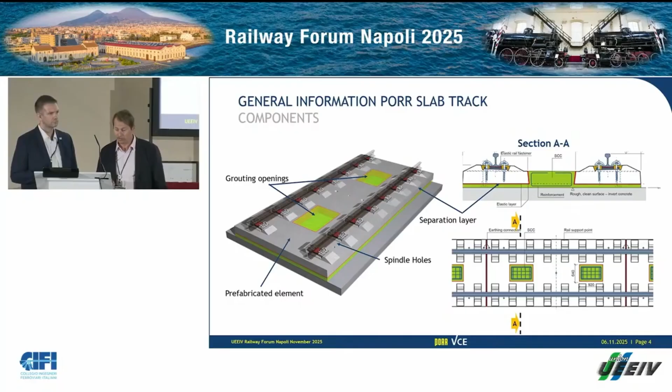I think ÖBB required this when the system was created, to maintain the debonding between the self-compacting concrete cast in situ, the monolithic component, and the prefabricated element, in order to be able to replace this slab.

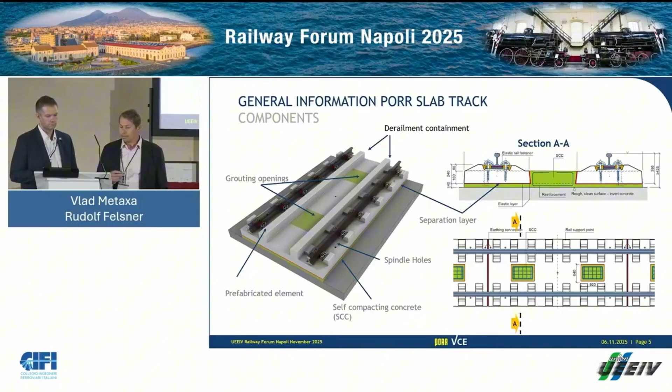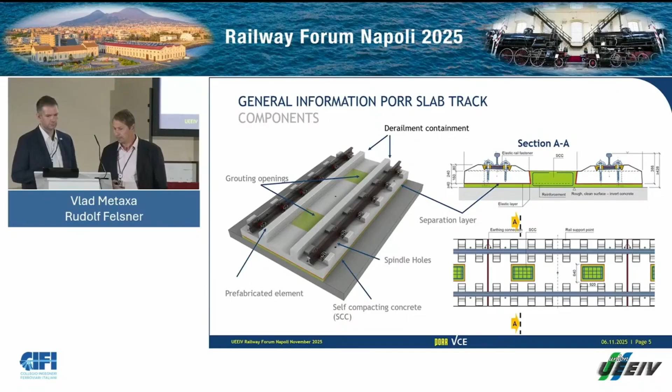And then we have the self-compacting concrete, which is a standard normal concrete, of course with a different flow slump. In terms of adaptability, and we'll go through all the projects in detail, we'll show that the derailment containment can be embedded in the system, which reduces the cost overall during production.

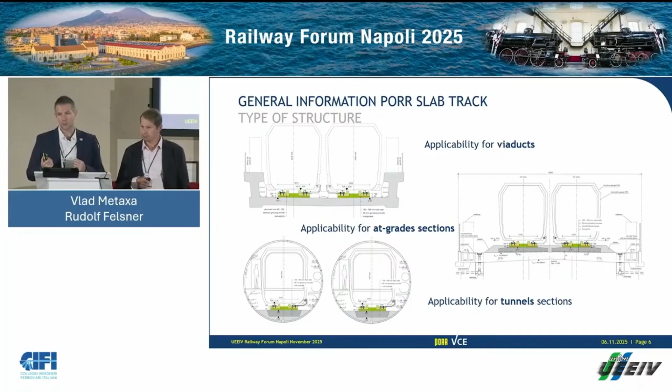From the applicability point of view, as a designer, I brought some plans with me. To sum up, slab track Austria fits any structure - tunnel, bridge, or grade section. We just need small adjustments to detailing, and the same fundamental layout simplifies design coordination across contracts and also reduces interface risks.

No project is like another, so there is also modular equipment that can be placed on slab track Austria, such as integrated manholes, noise protection, or a third-rail guardrail, and many more. And of course, the system is also available for turnouts to realize switches and crossings.

Beside the turnouts, we also had the installation of the rail expansion device, which is a very critical component on long bridges that require such complex systems. This was already implemented and has been under operation for 1.5 years now, and we have successful results from it.

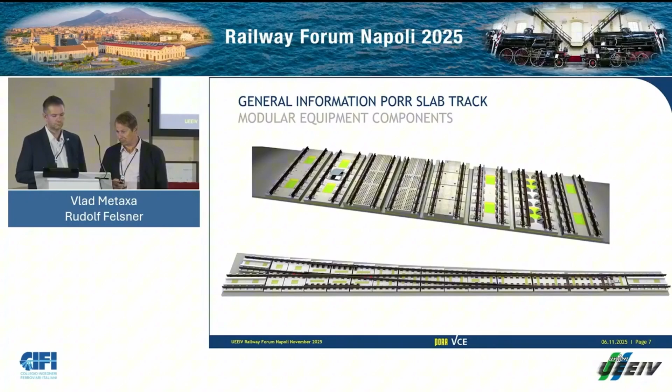Now we will go a little bit more practical, finishing with what was just an introduction to let you know what we are talking about. But we will go into the project - I think this is more or less what everybody's here for.

What were the challenges? For example, we start with the HS2 project. The main challenge was the high operational speed and design speed, which was premier in Europe - the first time an authority directly requested the track be designed for 400 kilometers per hour and have an operational speed of 360 kilometers per hour.

Of course, that was the challenge, but the good thing on this project was that the track component was awarded early. Instead of waiting years after the civil contractors completed, the track package was awarded at the beginning. That helped with interface integration with the track, and to design and optimize the structures for this type of track, knowing directly what type of track would be provided.

This contract for us is a design and supply contract. We will not do the installation - we'll just provide supervision for installation and training. However, we will supply and maintain, and ensure the quality of the produced element is in accordance with our specifications and the client's specifications, and of course the installation will also be in accordance with that.

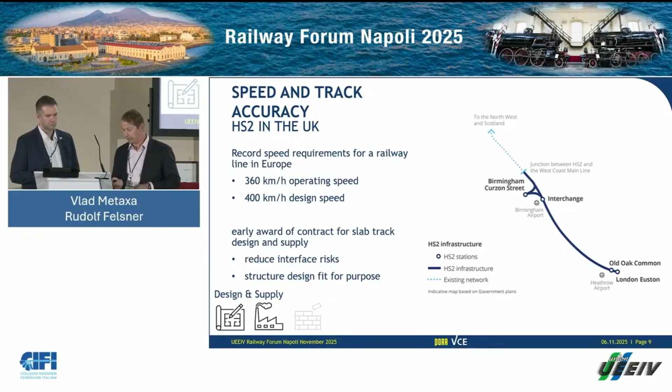From the design point of view, the main part was design optimization, or let's say the clearance, because every millimeter counts at 360. Also the interface management to get fit for purpose - the civil works leads to a slim geometry, which also counts in weight and material reduction. Because of the lower self-weight, this helps structures slim down and have much less self-weight on them.

So it's easier for the structures and for the logistics. Also for us, the information modeling here was focused on asset information modeling and not BIM modeling. It's very important to get the right information at the right time, to the right phase of the project, and not put too much into the models.

Now, going forward, the project commencement of production is on the way. We did not start production yet, but we still have a lot of coordination with the awarded track installer, and already a lot of dialogue in terms of implementation of the system.

So the key point for this project for us is the high precision accuracy of the prefabricated elements, and the coordination and interfacing, early interfacing with the party that will deliver the project.

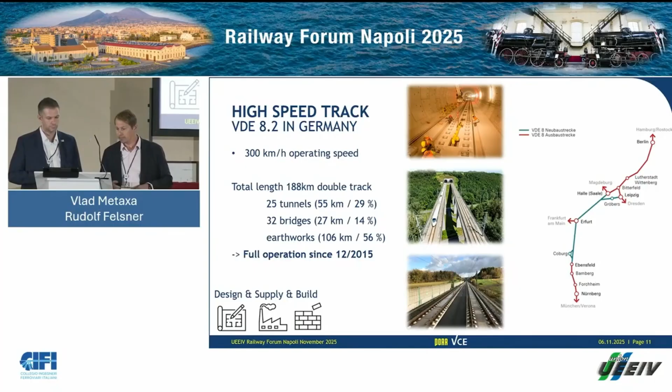From our perspective, it was design, supply, and build, so we had the full package of the project. What's important to mention, and we are proud of, is that Deutsche Bahn tested the new generation of Siemens trains on the area that was designed for 300 kilometers per hour, and they reached the speed record of 405 kilometers per hour.

Of course for Europe it's a premiere, and what we want to highlight is the accuracy of the track. They didn't have to do anything on the track for this special test. The accuracy and quality of the track was the same as when we left it, even 10 years after operation.

So this shows properly that a quality, well-installed track in the beginning will last and will decrease the maintenance cost, what our colleagues from the authority were mentioning a little bit earlier.

So let's switch to Austria, another country, my home base. Here the space constraints at the Koralm tunnel were the biggest challenges we had to deal with, because of the small tunnel diameter and its length of 33 kilometers in twin bores, and also the strict limitations on noise and vibration. Also special for the design was the manholes for the drainage in the middle of the track.

The solution that we came up with for this project was to reduce the width. Normally our slab is 2.4 meters, but for this project we reduced the width to 2.12 meters.

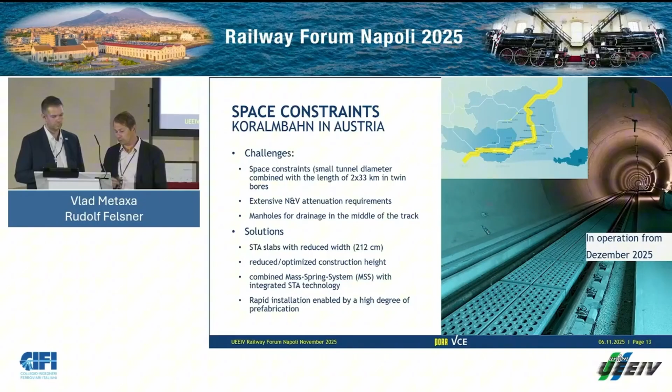So our colleagues from Deutsche Bahn, from Bahnbau, came with a clever idea, together with ÖBB, to install the sections of the tunnel even without having full access from both ends. This was a premiere for us, and it was very successfully implemented.

Going forward, some details from the design side: we dealt with the width of the system, because we had some higher tolerances to compare, and there we had to reduce the clearance. We achieved this with integration from the mass spring trough to a mass spring slab system.

The same is true for the system height. We also tried to make some improvements, reducing the system height by nearly 40 centimeters. This has advantages: less alignment changes are needed in the vertical direction, and no special tunnel shapes are needed anymore. Tunnel shapes, especially for a long project like the Koralm tunnel, require bigger diameters and more construction time, so we don't need these special tunnel shapes because of the reduced height.

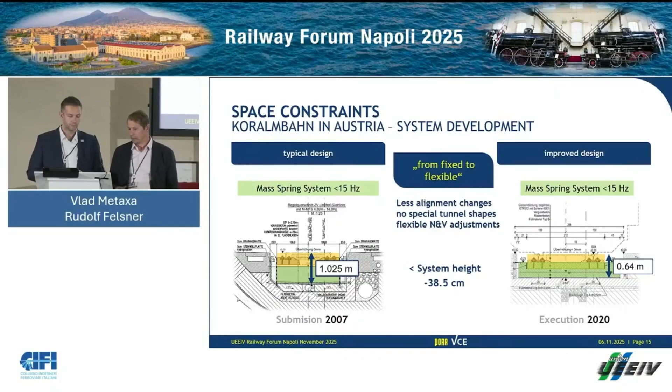So we just move from fixed to flexible. Moving on a bit, being aware of timing, we will go now to other continents. As you go further away from Europe, you find and face different challenges.

One example was in Melbourne, Australia, where we delivered the track for CYP, the Cross Yarra Partnership. There we had to adapt the slab to 1.6 meter rail gauge, broad gauge. We designed the slabs to still be transportable in a container, so they were thinner, not 2.4 meters, with a reduced width. They were produced with integrated derailment containment, and we addressed complex noise and vibration requirements as a floating slab track, high attenuation track, using a different fastening system within the slabs.

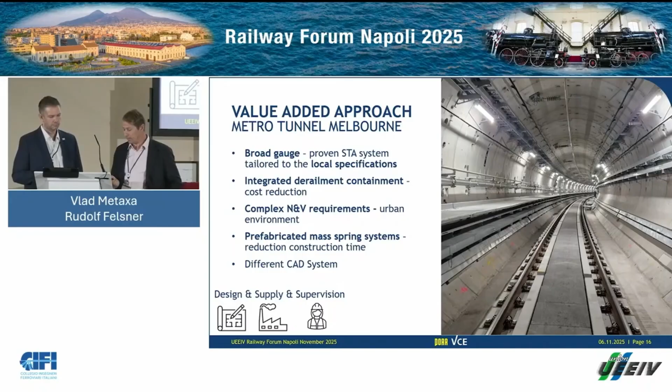We then moved to the next project, the NCRTC in India. There are people here who know about this project. It's a landmark for us because here we did only the system design and supervision for installation, under a contract with the authority, which was then implemented by local contractors, so the in-country value was kept in India.

One of the most complex and challenging projects we delivered was the Doha Metro in Qatar, which was complex from multiple perspectives. One of the most challenging points was that we had to coordinate with seven different civil contractors who were constructing tunnels, stations, and elevated sections at the same time, integrating the whole track together and delivering on time. That was the challenge of the project and the tasks we had to cope with.

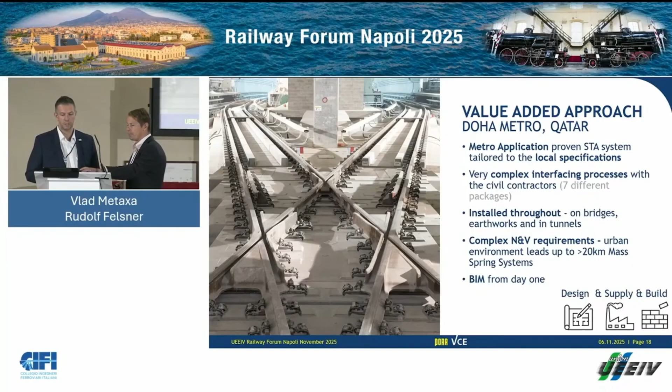The next project is Stuttgart 21, which was just completed by our colleagues from Bahnbau. We're talking about 33 kilometers of slab track installed in tunnel.

The key point we want to highlight in this project is that the slab track was installed without the rail. Usually PORR slab track is installed using a top-down methodology, starting from the top of rail and going down, compensating for whatever is underneath. However, in this part of the contract, we did not have the rail to do the installation, but we found solutions to do the survey and maintain the accuracy of the track and deliver on time.

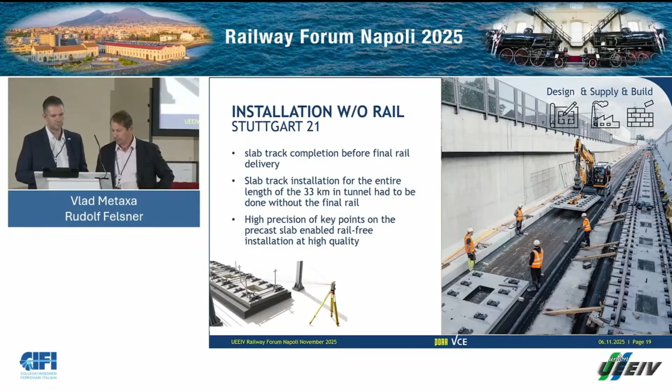From the design point of view, we had some design approaches and learned lessons from known asphalt layer-based systems. We modified the asphalt mix for longer durability and lower environmental impact. Also, the asphalt layer was fully covered - it's not as important in the tunnel, but as you saw in the earlier picture, it was also protected from the sun outside.

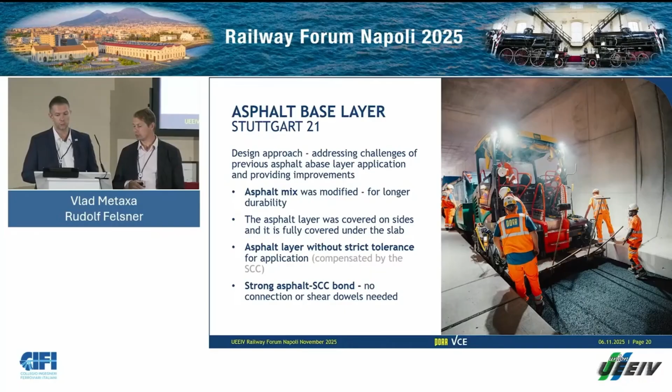The main interesting thing is that the asphalt layer can be made without strict tolerances, so it's not necessary to do extra work steps to get a smooth surface, because our self-compacting concrete will compensate for this difference in tolerances. Therefore we don't need any connections between them - no shear dowels or anything else to connect them. There's just good bonding between the asphalt and the self-compacting concrete in the system.

Now going to the overall summary - it's very important to say that this system has been used for four decades and has proven technology, so we can stand for the future, for the new challenges and new requirements we will face, all due to the fact that we're talking about a prefabricated modular panel.

From my side, looking at the clock, the most beneficial aspect of this system is that it's modular. It's made with high precision, and it's really proven over decades. I would say we are ready to face new challenges.

As a closure, and with that we'll finish - the main keywords are precision, performance, and partnerships. We will find ways to work with clients, find ways to work with authorities, and deliver what is needed. I'm proud to make the closing.

For me, looking back over my personal decades of designing slab track Austria, precision and partnership stand out as the key ingredients for a successful slab track project - and that's exactly what slab track Austria delivers. Thank you very much.

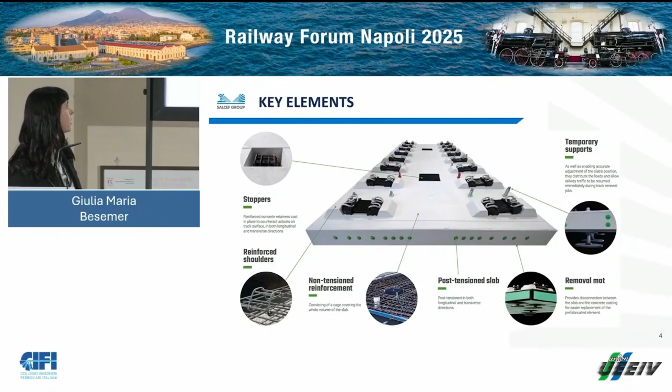Our slab indeed is particular in some ways. We have a reinforcement that is normal reinforcement, but also post-tension reinforcement. So our slab is post-tensioned in 2 directions, in the longitudinal direction and in the transversal direction.

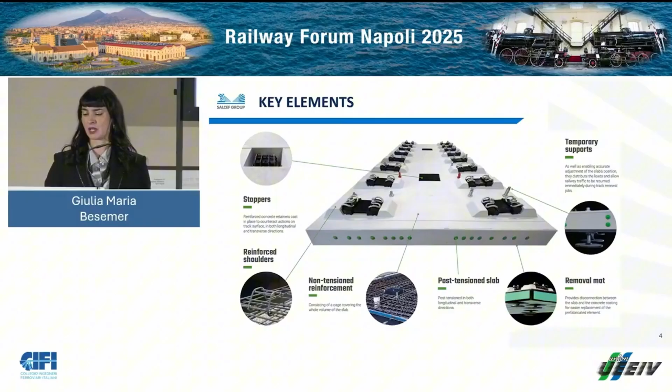Also, we have 2 key elements: the mechanical support system with which our slabs are equipped, and the possibility to produce the slabs with a variable geometry system. But let's go a bit deeper into these 2 topics.

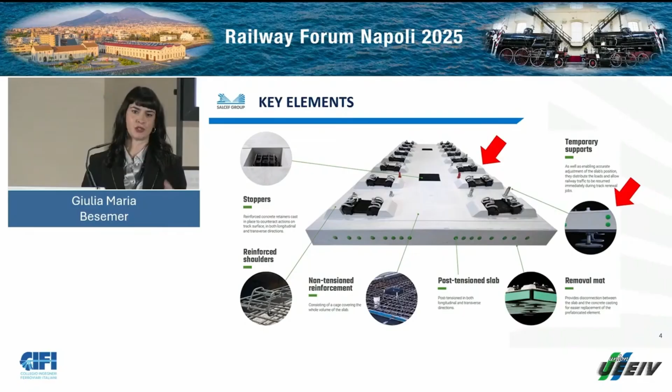The mechanical support system is actually the heart of our system. It is composed of the spindles that you can see in the picture on the right. The spindles are applied on the underpart of our slab and are composed of 2 elements, a screw and a base plate. Our support system fulfills mainly 3 functions.

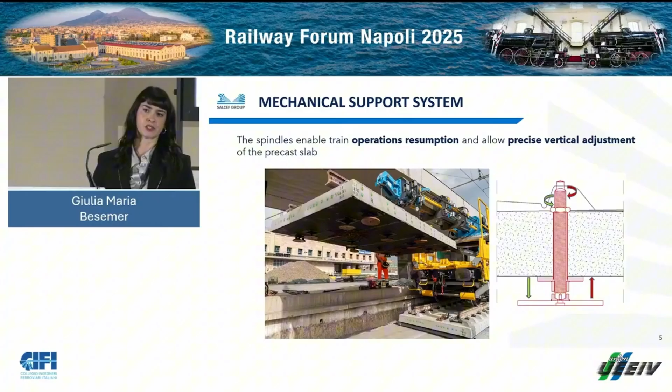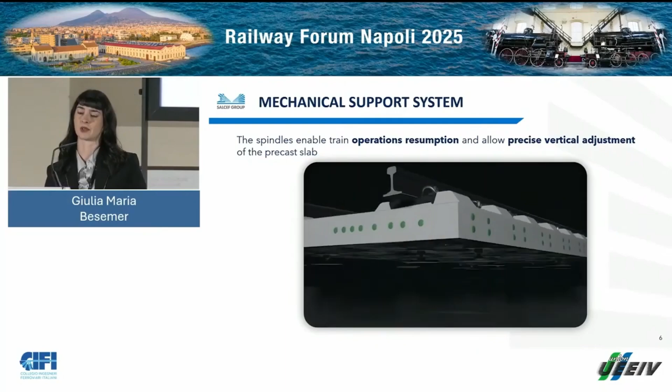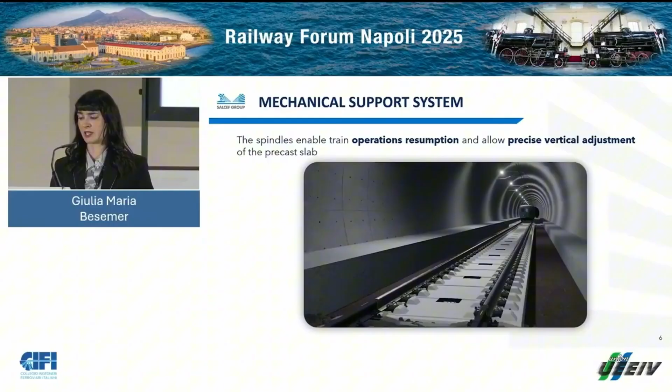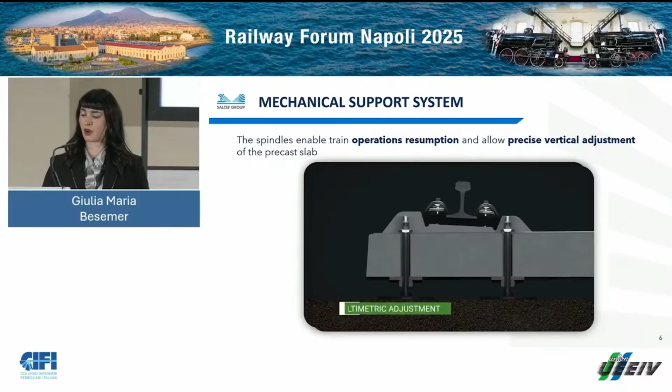So the first function is for sure the most important, because it guarantees temporary support during the installation phase. Every slab rests on 14 spindles, and so in this temporary configuration, it is possible to resume train traffic just standing on these mechanical supports. Second, acting on these spindles and on the screws, it is possible to adjust the vertical alignment of the slab, and so to reach the design alignment.

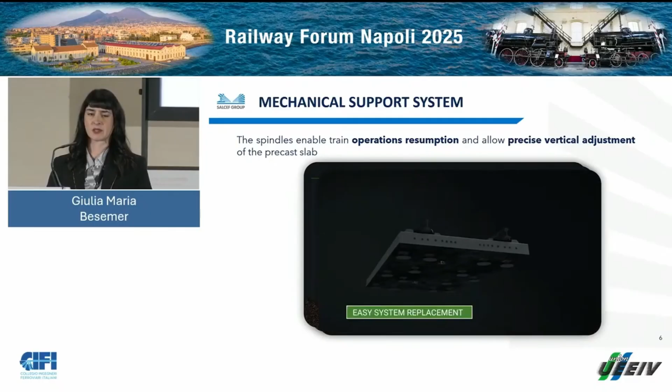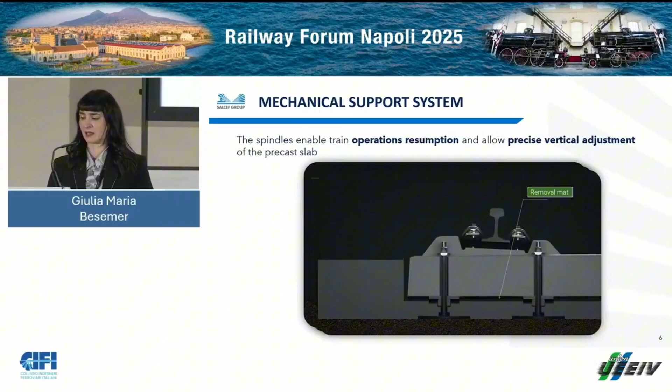Third, it enables maintainability of our slab track system. Reinserting the screws in the slabs in a future time, it enables us to lift the slab and to replace it with a new slab. This is, for instance, necessary when a slab gets damaged. But this is not everything.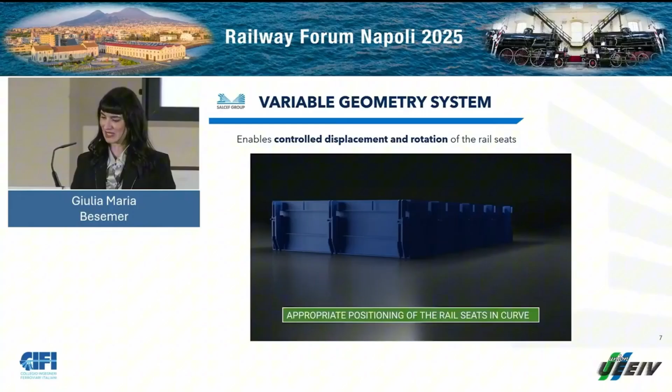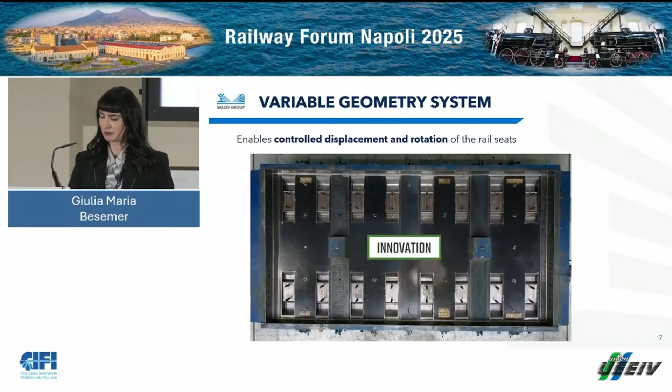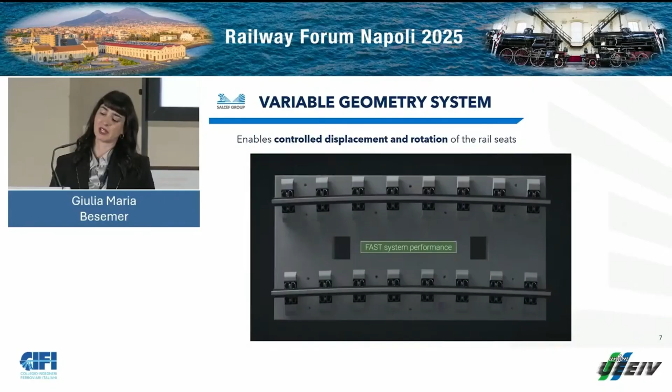So the second key feature of our slab is the variable geometry system. With this system, it is possible using this kind of special mold, which is patented, to produce customized slabs. This means that the single rail seats can be moved and put in the correct position by rotation and displacement, and so to adjust to the track alignment. This obviously brings advantages. We have a better distribution of the tensions inside the slabs, stress peaks are reduced, and so also the risk of damages in the rail seat area.

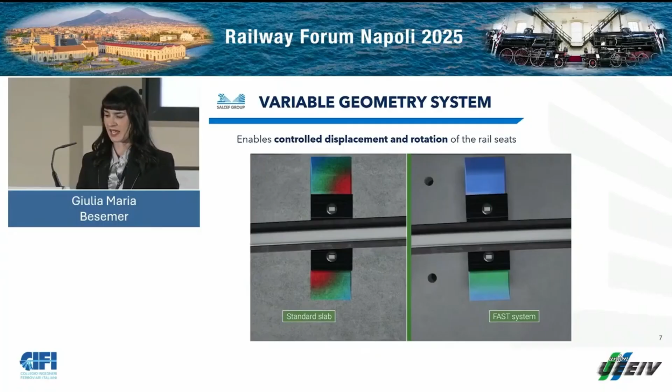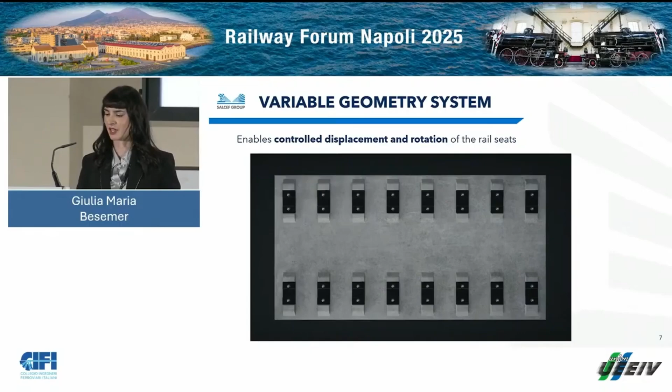Secondly, we have also the advantage that we do not need to rely on the regulation possibilities of our fastening systems. So this regulation remains fully available for the infrastructure managers in order to do maintenance if needed in future. But the configuration of our system is not enough to do the trick.

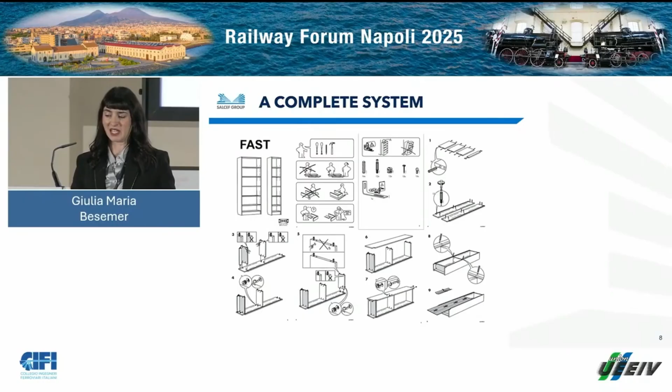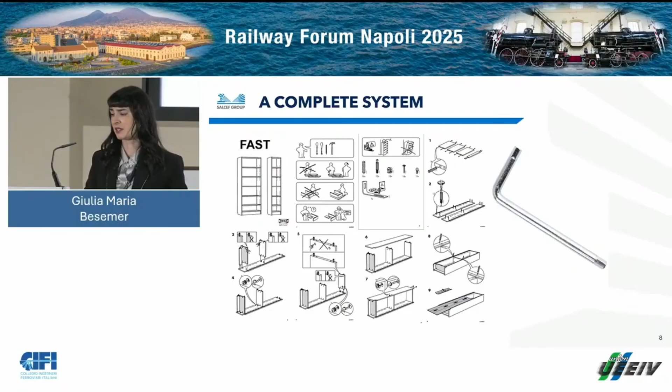So I was talking about a complete system, and as everything that needs to be built, we need three main components. We need the materials, we need the technique, and we need the correct tools, just like a furniture piece of IKEA. And so in our case, obviously, the material is the slab with its features. The technique is our construction method, and the tools are given by our work trains.

The construction method can be summarized roughly into 4 phases. We have the dismantling of the existing ballasted track, the positioning of our slabs on the underground, the installation and the final check of the new rails, and the grouting of the concrete filling layer that is fixing the position of the slabs.

Obviously, also the construction site follows this scheme. So we have a construction site that is divided into sequential work zones that all work at the same time, but in different areas. So the installation is organized in a zone where we have the ballast removal, one where the slabs are being laid, and one where we are casting our concrete.

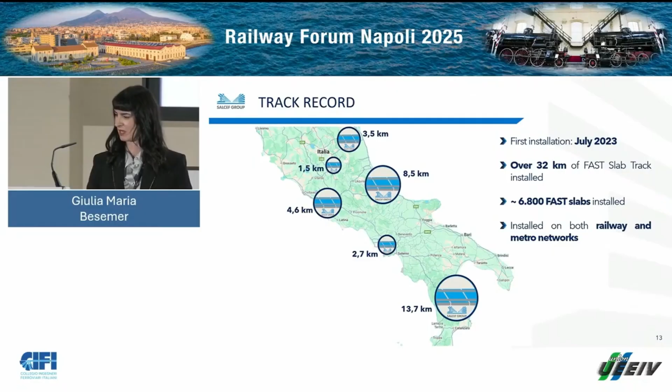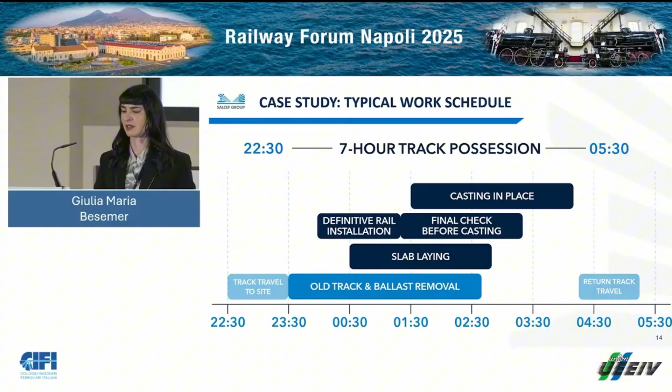This is actually the case of a real scenario. We were working at a tunnel in Italy, the Galleria Carrito. This was a 3.5 kilometer long tunnel with a single track, and we were working just in night shifts, and every day the traffic had been resumed. How did it go? So, you can see, this is the tunnel when it was finished.

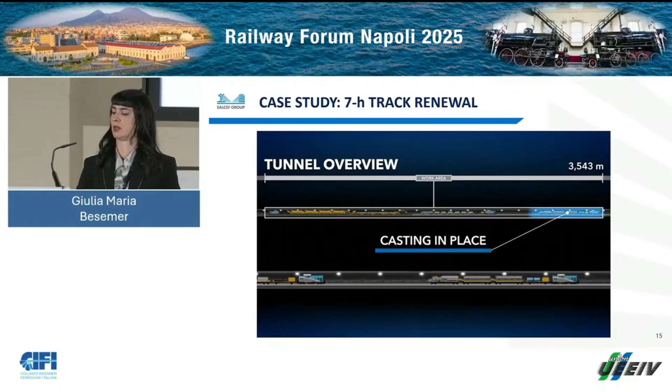During the day, obviously, we are doing some auxiliary work. We are loading the materials on the trains, the raw materials for the concrete, the slabs on the slab laying train, and organize the work for the night. The first thing we are doing is the excavation works. So, the train that is working first is the track and ballast removal train.

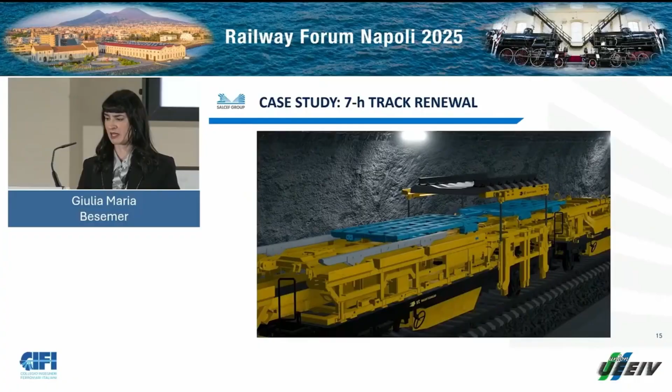We are working with sections. Track sections are separated and loaded on the train and then automatically piled on the wagons. The same thing happens then with the ballast. The ballast is taken and collected and then stored into hopper wagons. And then it is brought outside the working site and then it gets disposed of.

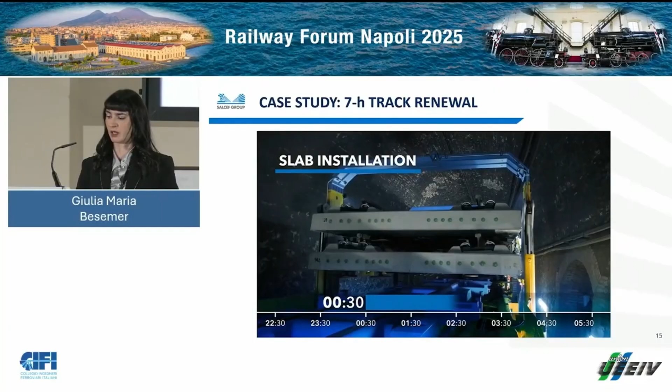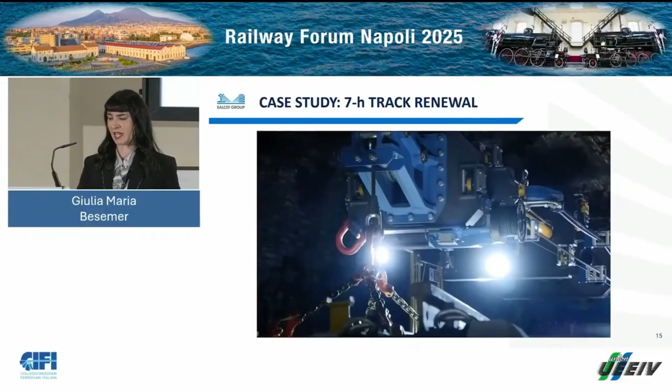In this phase, we are also controlling the underneath layer and, in case, putting the right material in place. Subsequently, in the same section where the ballasted track had been removed, we are proceeding with the laying of the

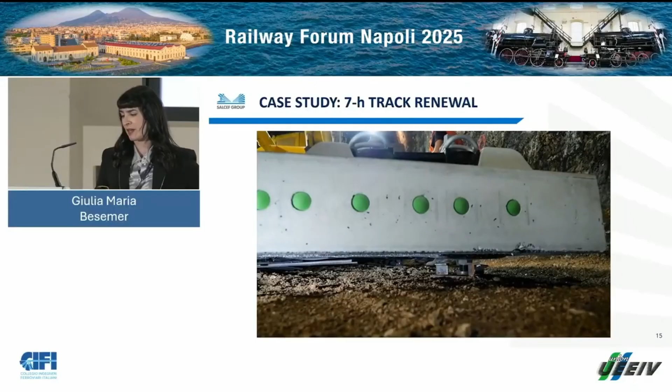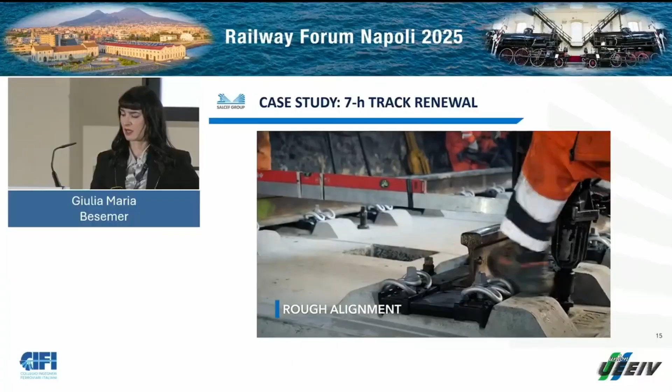new slabs. This means that the slab laying train is coming forward, the slabs are brought to the front of the train and lowered with a crane, put in place by the operators that are working with a rough alignment at first of the slabs, acting on the screws of the mechanical support system, and also with spindles that are pushing from the sides. All the slabs are equipped with short rails.

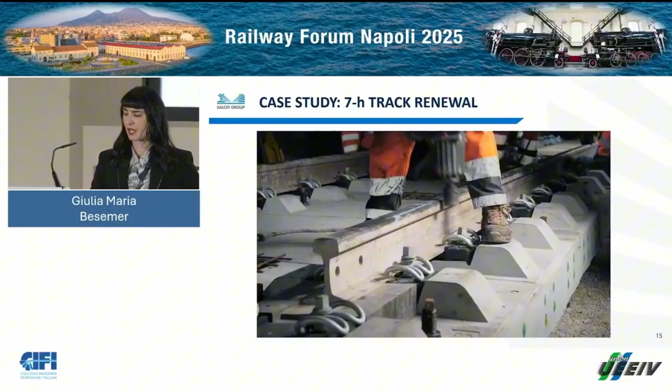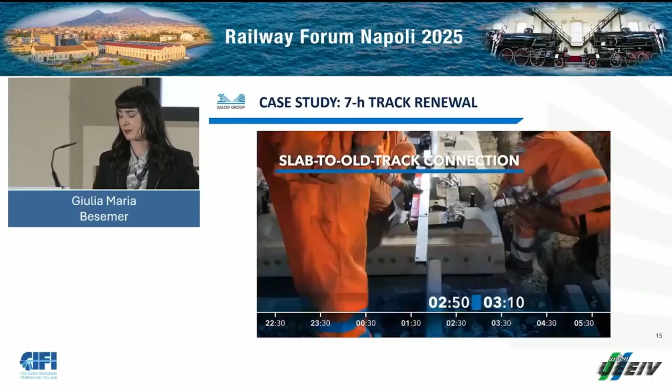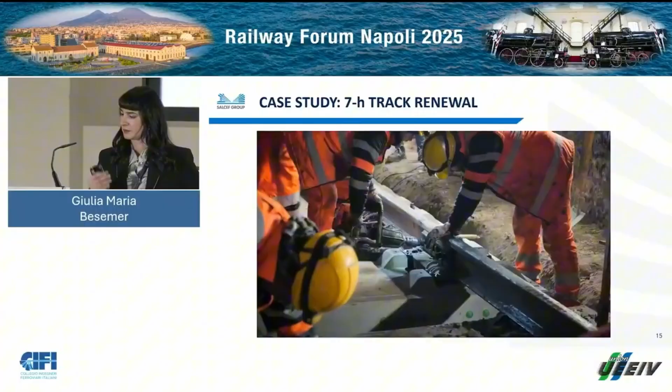These short rails are then joined together mechanically with fish plates and bolts. And the last plate is then obviously linked with the existing ballasted track that is in front, and that will be worked the day after. So this way we are substituting, as I said, almost 60 meters of track.

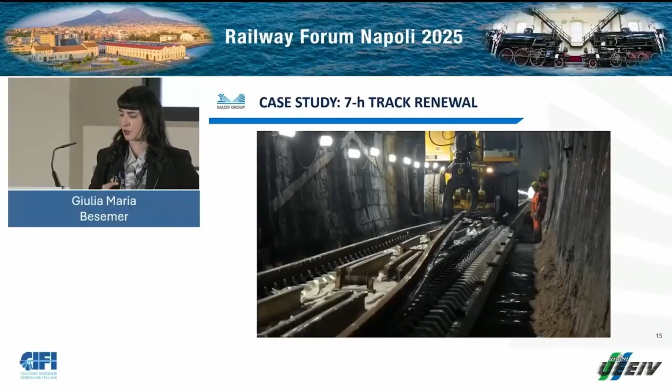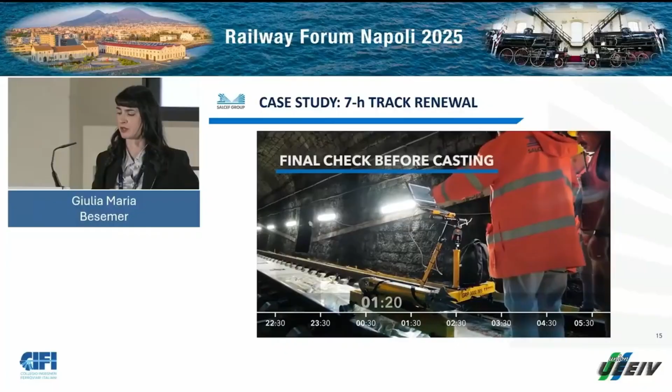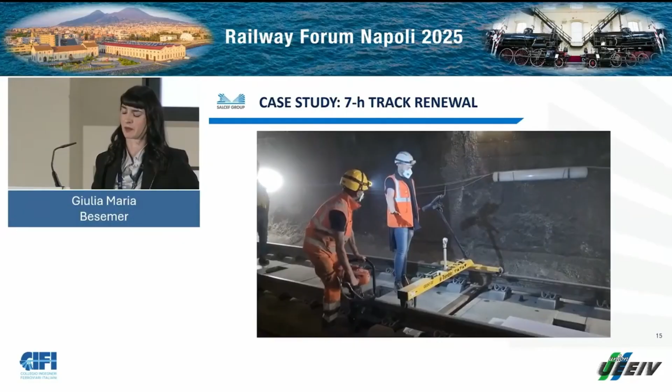Behind this construction area, we are going forward with our work. So we are substituting the short rails with long new rails, normally with 108-meter rails. Checking the geometry. This time the quality of the alignment needs to be perfect. And this is actually the operation that needs more time to be executed.

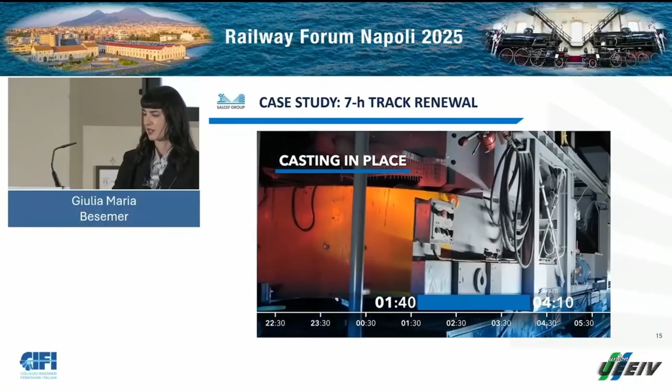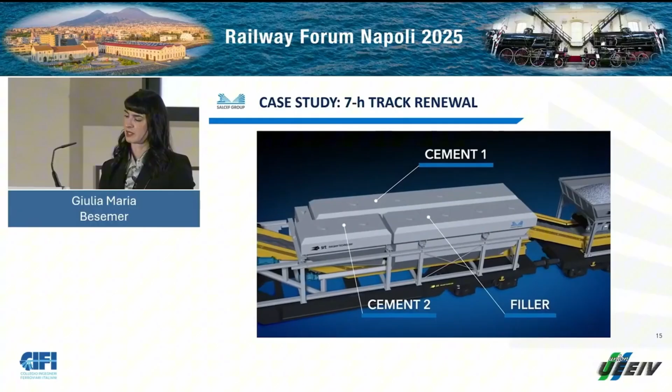We are installing then the molds that are containing the concrete casting. And finally, our concrete casting train is coming to the working site. All the materials are already on the wagons on the back. So as you can see, we have the aggregates, we have cements, filler, water, and in the front there is the mixer for the production of the concrete.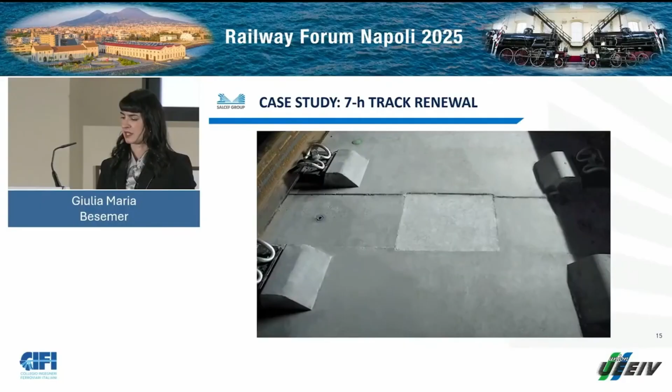It is a real production unit, so we can perfectly register every batch that we are producing. And the concrete is directly poured inside the stoppers until the whole slab is filled. Once it is completed, we can remove the molds. And before the resumption of traffic, we are controlling the geometry of the track. We have, for this, extra instruments that are installed on our trains.

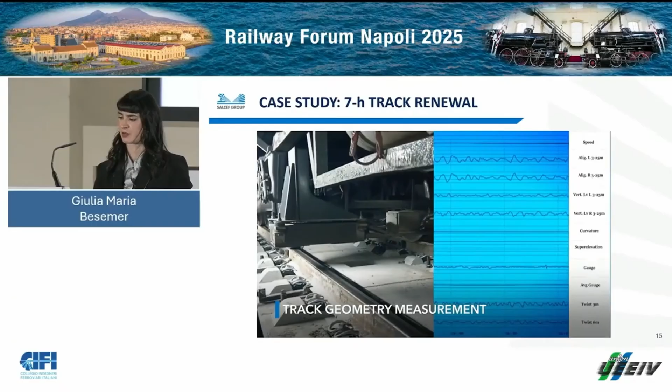And once the work is done, the trains go back, leave the construction site, and the morning after, the trains are running. And here you see not just the rendering, but also a real train running over our slab track. The productivities, you have seen them before. I have stressed you a bit with this number, so it's up to 57 meters per night shift.

So summarizing, what are the advantages of our system and what is new about our system? So we are able to substitute ballasted track with slab track using night possessions. We have high productivity, up to 57 meters. We can daily resume train operations.

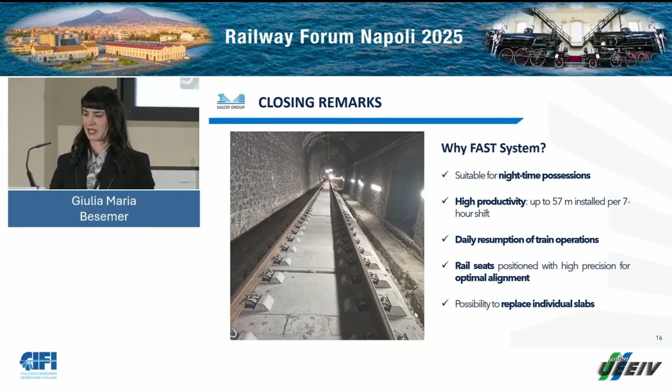Rail seats can be positioned with high precision, so we can manage tight curves, transition curves up to 150 meters, and gain optimal alignment of our track. Obviously, also the replacement of individual slabs is possible. So what can I say? FAST is not just the slab, but actually a complete slab track solution.

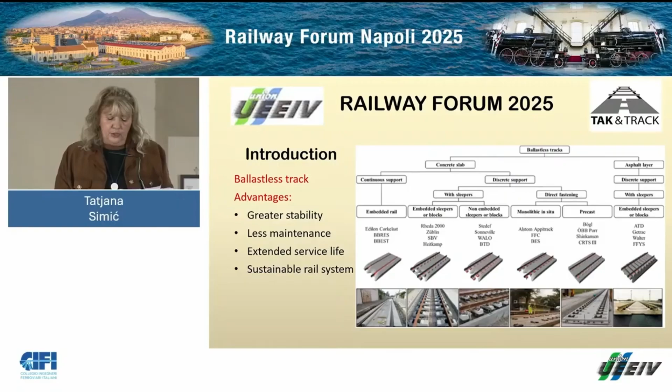The choice of the track type depends on several factors. It is based on the assumed layers of the superstructure, which form the model and are used for calculation. Slab tracks can be classified by how rails are fastened, by the stiffness of the system, and last but not least, the environmental aspect.

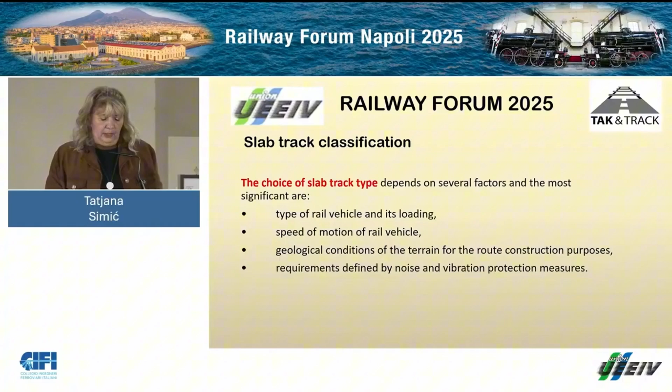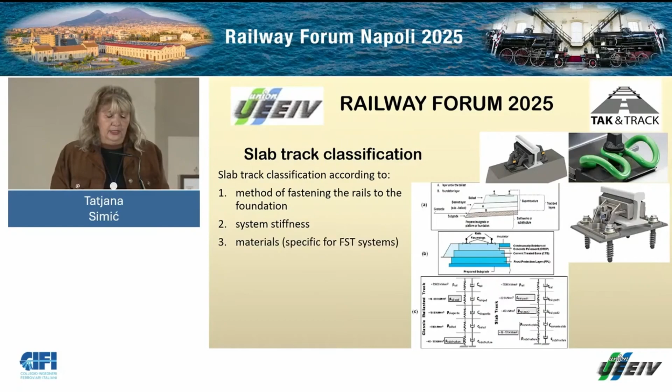Let's look at the elements that influence track type selection. Fastening system, including elastic, vibration reducing, or embedded fasteners. System rigidity, which can be finely tuned using fastening materials and elastic layers. And finally, floating slab track, where the choice of materials, rubber, pneumatic cushions, or steel springs affects system behavior.

The paper outlines performance characteristics based on installed elements and applied technologies, especially welding, and the paper also addresses the transition from slab track to ballast track and drainage systems in stations and depots. There are technical specifics that require careful attention. Currently, the Makiš depot for line 1 of the Belgrade metro is under design, and these issues are being addressed.

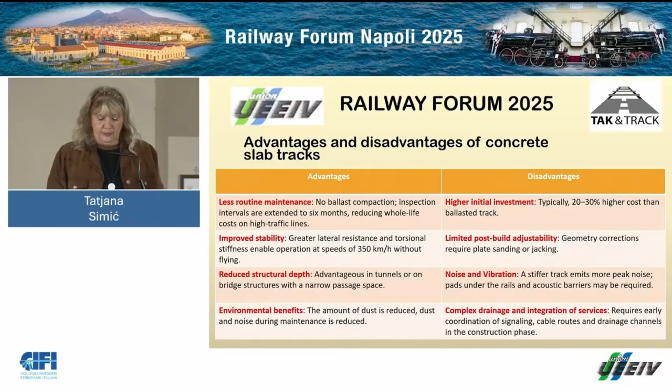As many of you know, the high-speed railway from Belgrade to Subotica is now in the last phase, operational. A key structure on this route is the Čortanovci tunnel, consisting of two separate tunnel tubes where the slab track system is used. A representative example demonstrating the use of slab track on the Belgrade-Subotica railway line is the Beograd Centar station and the Novi Beograd station, where the superstructure is constructed using slab track technology. Both were built with slab track, showing how this technology is used in modern urban railway sections.

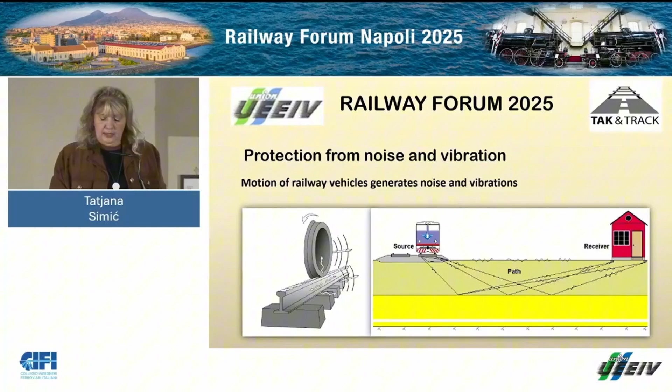The general problem and effect of noise and vibration is manifested through the interaction of 3 connected elements: the source of noise and vibrations, the medium through which noise and vibration spread, and the object exposed to noise and vibrations, the receiver. To reduce noise and vibration, we can act on 3 levels: measures at the source, measures along the path, and measures upon the affected structure. Noise and vibrations generated due to rail vehicle motion are interconnected. Suppression of one suppresses the other to some extent.

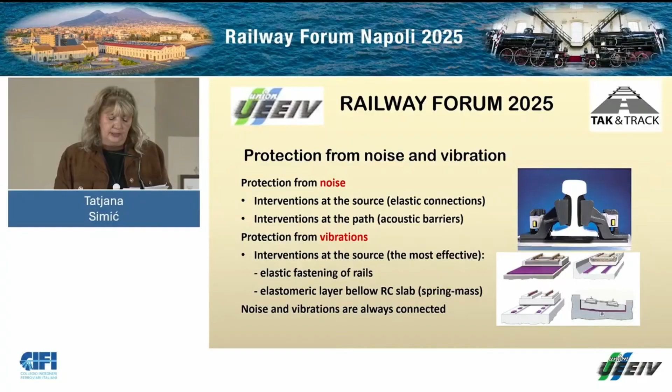The most effective protection from noise and vibrations is at the source: elastic rail fastening or patents such as the Vanguard system, elastomeric layers of various forms below sleepers, or reinforced concrete track slabs. In addition, effective noise suppression is achieved by various acoustic barriers along the track. To suppress traffic-induced vibration upon important vibration-sensitive facilities, special vibration isolation systems may be applied to the building in question.

Slab track structures have proven their value in practice. There is still room for improvement and integration with other infrastructure elements, such as signaling systems, power supply, and civil engineering components. Interfaces with other technical disciplines remain open for discussion and further development.

Slab track: connecting technology, sustainability, and progress. Our work today builds the foundation for the railways of tomorrow. I believe cooperation and innovation will lead forward to a safer, faster, and greener railway future. Every new project reminds us that behind every rail and every design stand human effort, knowledge, and passion for progress. And gatherings like this forum truly inspire us, giving the chance to share experience, exchange ideas, and make our collective knowledge even stronger.